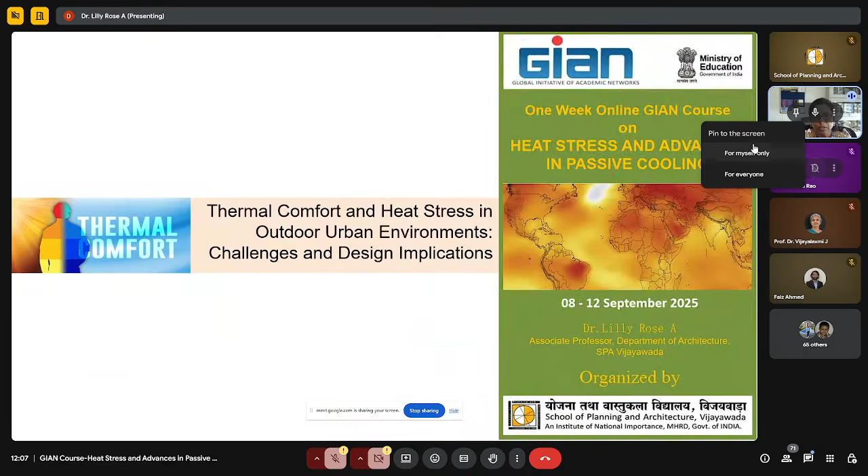So today I'll be giving an overview of thermal comfort studies, especially focusing on outdoor thermal comfort studies that have been done in a few Indian cities.

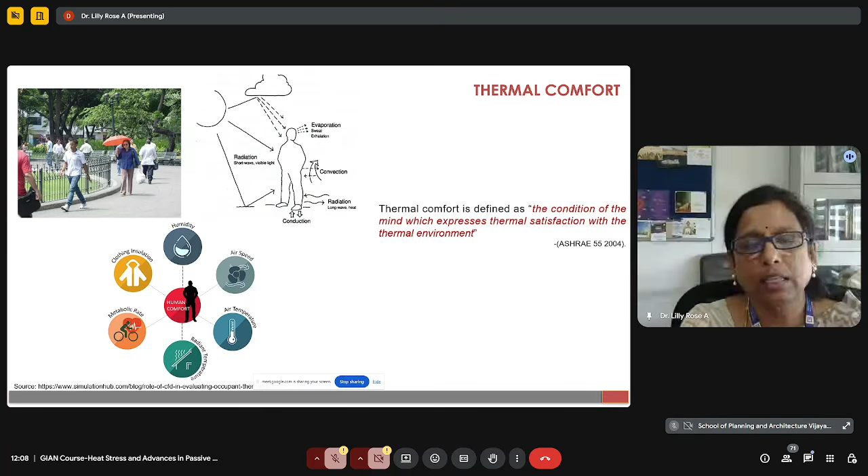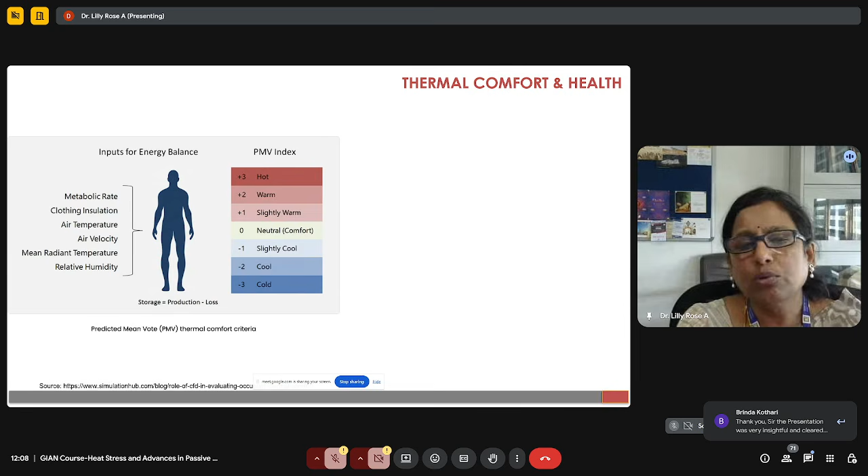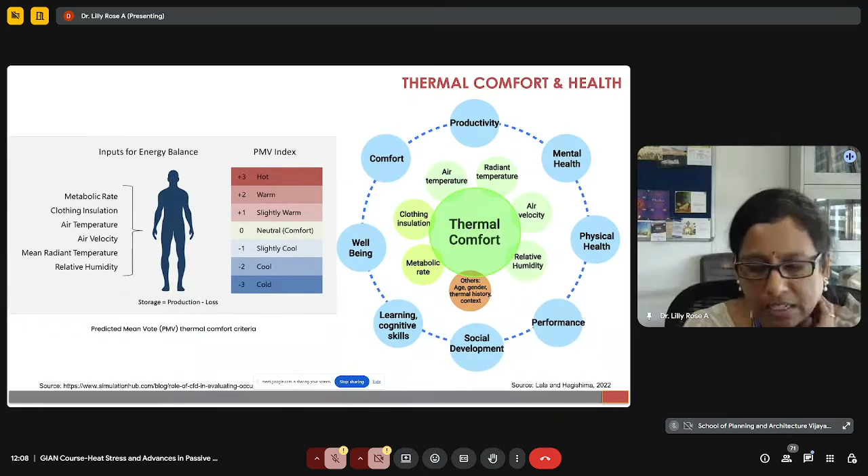So here we'll be focusing on all this. Why this is important is basically these studies would enhance productivity and have a significant impact on health. Thermal comfort affects productivity, performance, learning and cognitive skills, health and well-being. So it is important in all these aspects.

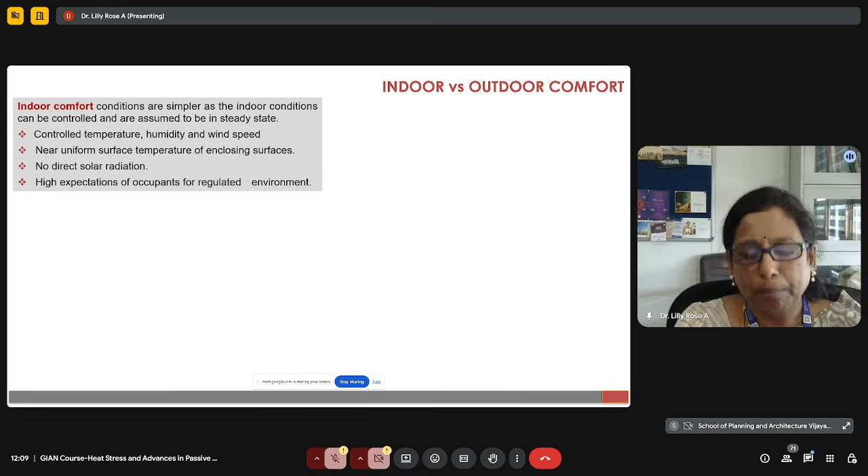Just to give a brief on why indoor and outdoor are different: indoor studies can have controlled temperature and controlled humidity. It's basically a steady state affair wherein all indoor parameters can be controlled, in the absence of direct solar radiation. When it comes to outdoor comfort, it is very difficult because you cannot predict the outdoor state of environment, it is not in a steady state condition.

It also varies in terms of the expectation of individuals, and there are three basic parameters which differentiate indoor from outdoor conditions. Basically, in terms of psychological aspect, that is in terms of adaptive nature, especially people tolerate a larger variation in climatic conditions in the outdoors compared to indoors.

In India, we follow somewhere around 24 to 28 or 24 to 30 degrees as a comfortable range indoors. But in terms of outdoors, we do tolerate up to 32 degrees, depending on the geographical region where the city is located. There is also this thermophysiological aspect, which affects comfort based on clothing level and activity level.

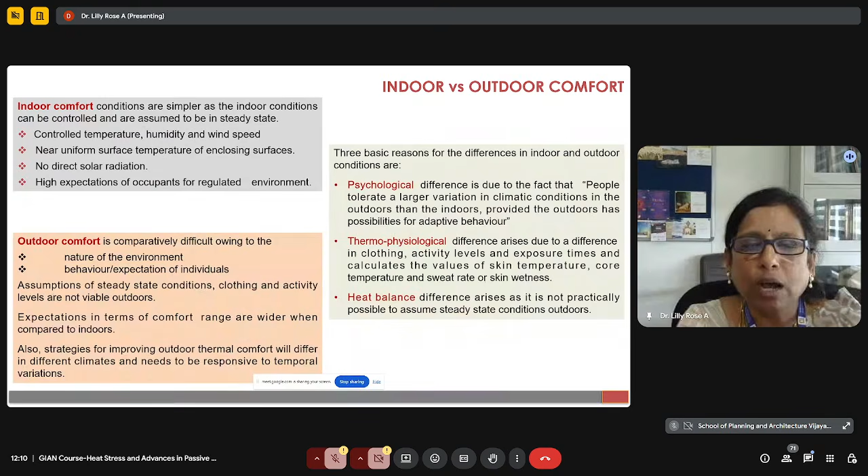Even during a hot summer day, we see cricket matches conducted in the afternoon because people's expectation is different, their mental state is different. So the comfort ranges vary depending on the activity you perform. Then there's the steady state condition, basically the heat balance, so outdoor comfort ranges are much wider compared to indoor comfort ranges.

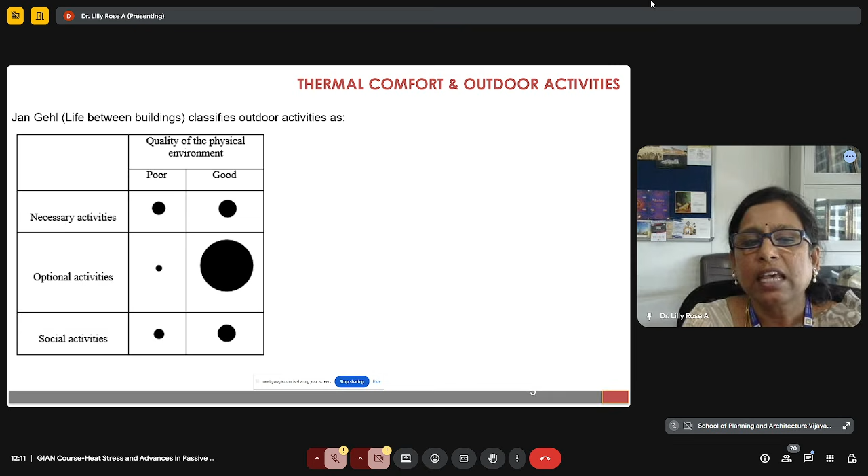This affects the activities performed outdoors. For necessary activities, irrespective of the outdoor condition being good or poor, we still perform them. But for optional activities, they are significantly reduced when the quality of the outdoor environment and comfort conditions are not appropriate, and enhanced when conditions improve.

There is minor variation in terms of social activities. These uncomfortable outdoor environments result in people spending less time outdoors—we hardly see people outdoors during daytime—and it reduces social activities and also reduces optional activities like visits to cafes, restaurants, or other outdoor spaces for leisure or recreation.

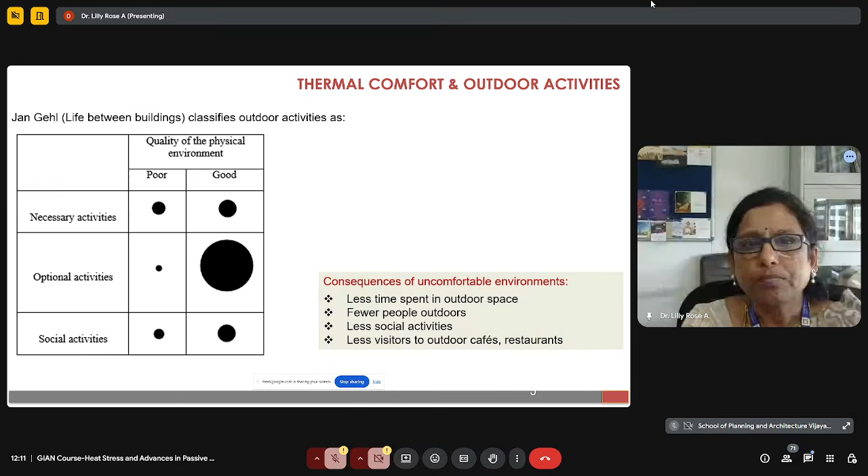To give a brief on indoor thermal comfort, the variation in meteorological parameters has quite small ranges. If you see the diurnal variation in indoor compared to outdoor, the diurnal variations are much higher outdoors. So here we can see that the temperature varies.

These variations create different kinds of thermal feeling or thermal sensation in human beings. Within a short spatial region outdoors, conditions vary a lot. If you stand between two buildings, there can be heavy wind speed, but if you go to the street, the wind conditions completely differ. Similarly, standing under shade, the comfort condition differs, and standing directly under the sun, the comfort condition differs. So there is a lot of spatial variation in outdoor conditions compared to indoor.

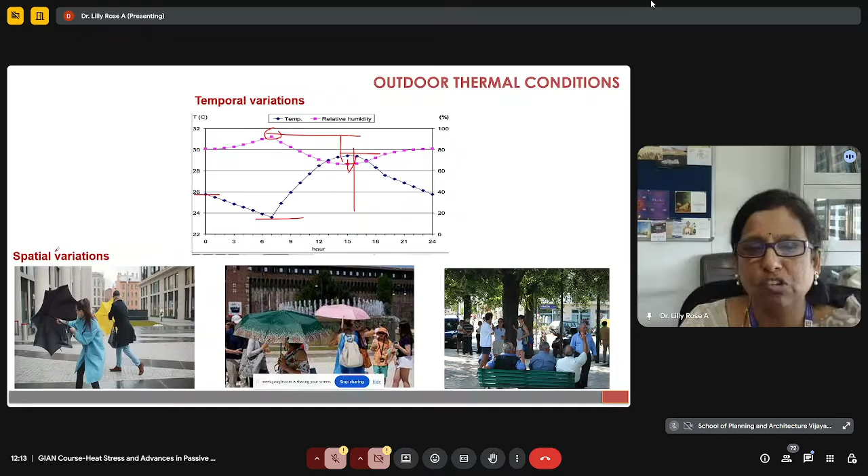These temporal and spatial variations create different kinds of thermal perception and sensation outdoors, including wind conditions. Indoors, anything beyond 1 or 1.5 meters per second, people cannot withstand and find it quite uncomfortable. But outdoors, people can withstand wind speeds ranging from about 2.5 meters per second to about 10 meters per second, depending on the activity being performed.

When performing fast walking or jogging, you can even withstand wind speeds up to about 8 to 9 meters per second. But if you're just relaxing or sitting, you can withstand up to about 2.5 meters per second. This is the kind of variation in wind speed that we perceive outdoors.

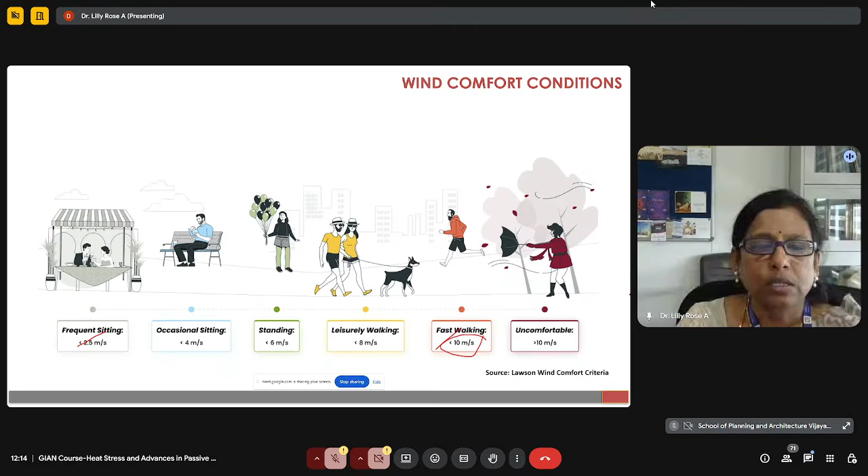So to give a brief summary, depending on the latitude, dry bulb temperature, relative humidity, and wind speed, our comfort perception or sensation differs.

This is an example of how temperature and humidity behave and how they yield comfort conditions. This is in Lund, Sweden, where the temperature variations are between 17 degrees Celsius to about 2 degrees Celsius, ranging from summer to winter. The relative humidity percentages vary from about 66% to about 91%.

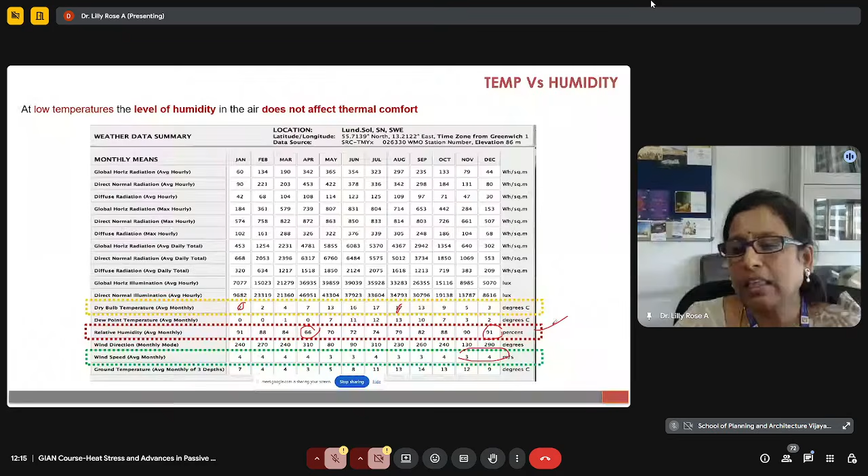So the relative humidity is quite high, but we will not feel uncomfortable because the temperature hardly crosses 20 degrees Celsius. Though the relative humidity is high, at lower temperatures we won't feel very humid, and it may not have a negative impact on comfort. You can also see wind speeds here are quite high, ranging from 3 to 4 meters per second. So here it is the wind chill index that matters a lot rather than the humidex index in creating discomfort.

So here, if you see, this is the comfort condition. These areas where you feel uncomfortable are mainly due to the higher wind speeds and not because of the higher humidity. Though the humidity is quite high here, the discomfort is mainly due to wind speed and temperature, not humidity. Whereas in the same case, this is Vijayawada.

All three examples I've chosen are humid conditions, but the first one is cold and humid. Here, this is hot and humid. The temperature ranges between, the maximum is somewhere around 32 degrees and the minimum is about 24 degrees. So we just have roughly around 8 degrees variation between winter and summer.

The humidity ranges from about 65% to about 81%. Though the humidity is lesser compared to Lund, which is cold and humid, here the issue in terms of comfort is mainly due to humidity and higher temperature. The high temperature and higher humidity is causing the discomfort. You can also see the wind speed is hardly 1 to 2 meters per second, so it's lesser. The discomfort is mainly due to higher temperatures and higher levels of humidity.

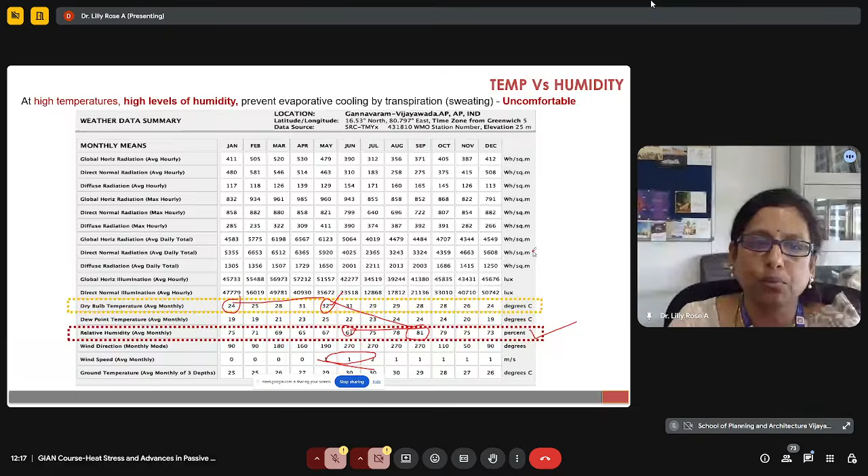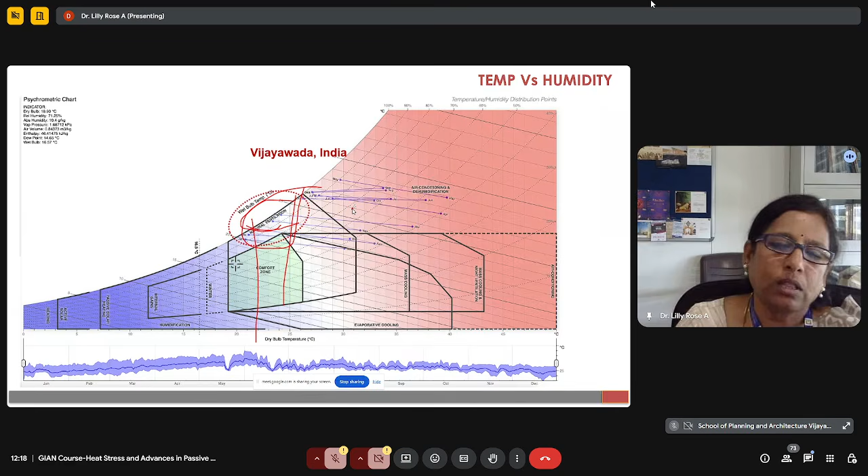Here we can see the temperature ranges somewhere around 22 degrees Celsius to around 26 degrees Celsius. Even at that particular 22 or 26 degrees Celsius, we would find discomfort mainly because of higher humidity ranging at around 70% or 80%. This would cause a lot of discomfort in terms of outdoor conditions. So this is another place, this is Hong Kong.

So this is basically a warm and humid climate where you can see the temperatures are basically ranging between 16 degrees Celsius to about 30 degrees Celsius in summer. And here again, the variation in relative humidity is similar to what we saw in Vijayawada, somewhere between 65 to 76%.

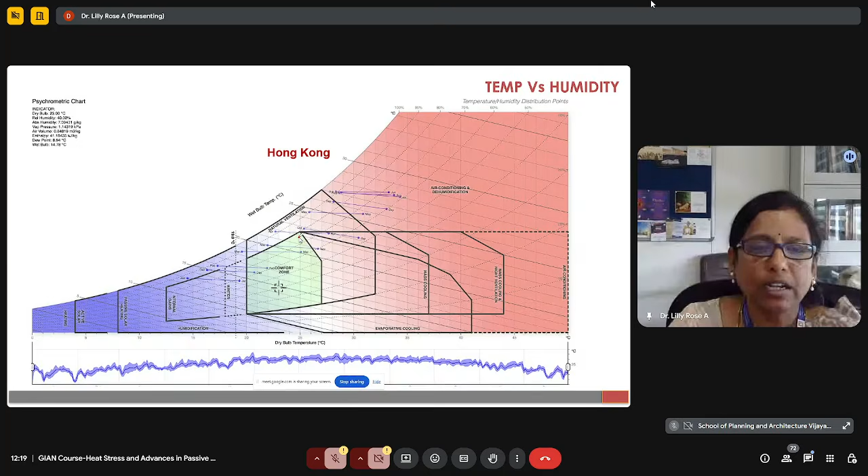But here the comfort conditions are comparatively better than Vijayawada, though the temperature ranges are 30 degrees and the relative humidity is similar to what we experience in Vijayawada. Here the temperature ranges are different, but the higher wind speed, 3 to 4 or 5 meters per second, enhances the comfort. So you can see here a lot of lines fall within the comfort range, mainly because of higher wind speeds.

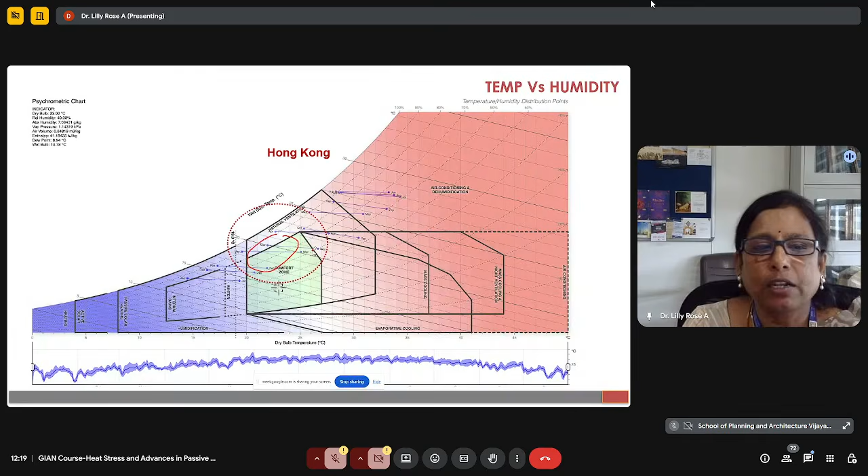So the issue is what we need to look at: it is not just the values, it is a combination of the temperature, the humidity and the wind speed. In cold climates, the wind speed creates a lot of wind chill index, but in hot climates, the humidity and higher temperatures lead to a lot of discomfort.

I think these things we have already discussed. The mean radiant temperature, basically when it comes to outdoors, during daytime we gain a lot of temperature, like Dr. Fayez was mentioning, during daytime the MRT increases. So it is basically the reflected radiation that one perceives during daytime, and that would create a lot of heat gain in the human body.

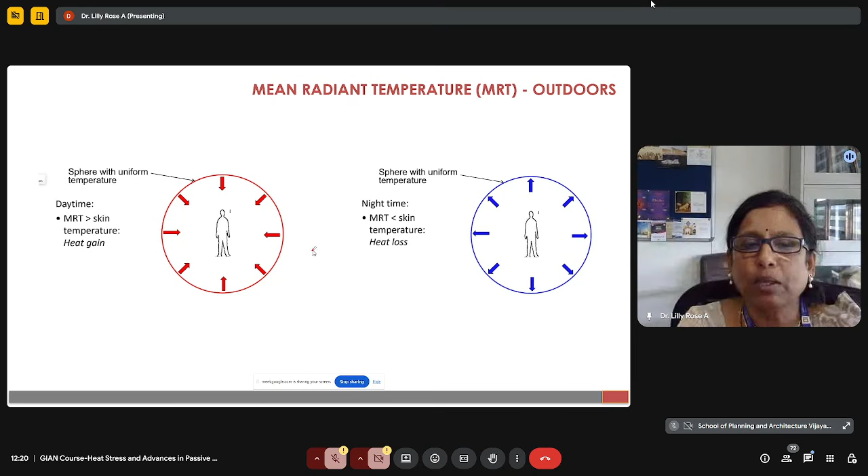During night, in the absence of solar radiation, we lose heat to the atmosphere. So this is important: mean radiant temperature is an important index which we need to look at, because that would define whether we are going to gain heat or lose heat to the environment.

And as I mentioned, though the temperature, if you see here, in all three cases is only 20 degrees Celsius, the weather at that particular time matters. So this MRT is also predominantly based on the weather condition on a particular day. If you see at 20 degrees Celsius, if it's cloudy and calm, we would feel the same temperature. But the same 20 degrees Celsius, when we have higher solar radiation, which would result in higher MRT and heat gain, though there is no wind speed, we would feel a temperature of about 30 degrees Celsius.

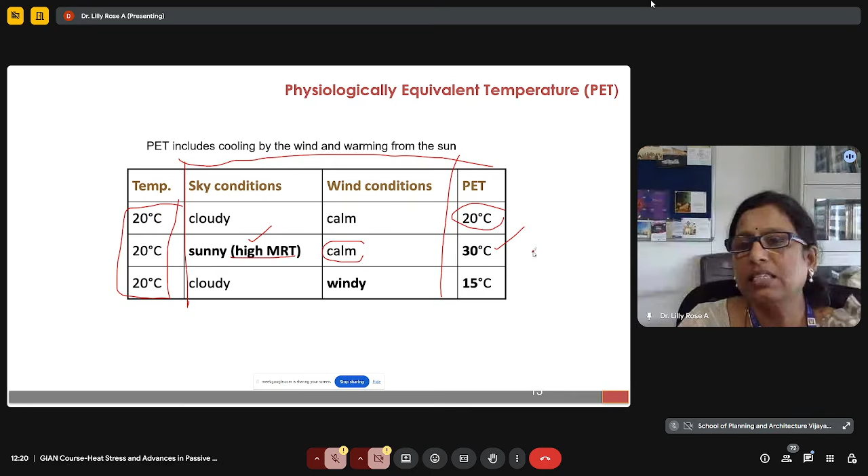This is basically our comfort index in terms of PET. So the higher solar radiation, we would gain a lot of heat, so we would feel as if it is 30 degrees Celsius. Similarly, with 20 degrees Celsius, when it is cloudy and windy, though it is 20 degrees Celsius, because of higher wind speed, we would feel as if it is 15 degrees Celsius.

So it also depends, the comfort also depends on the weather condition at that particular moment, and that also affects our comfort feeling or comfort sensation. Basically, there are a lot of outdoor thermal comfort studies that have been done in terms of field surveys, field measurements and simulation, which we have seen over all these 4 days.

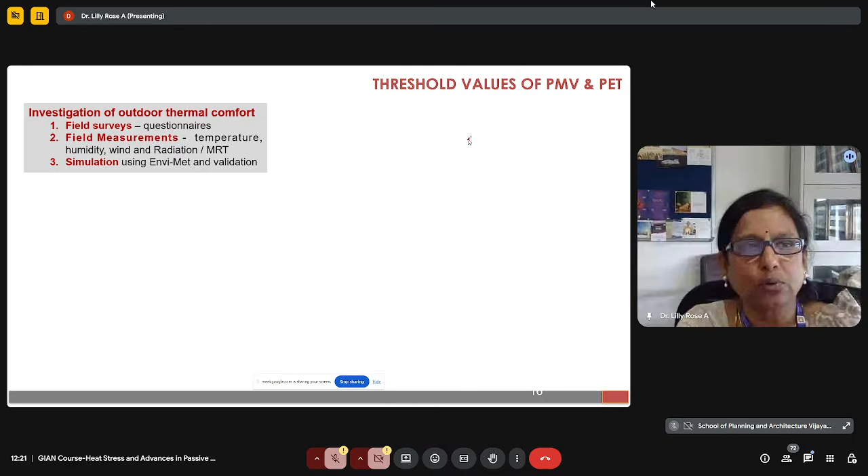Here these are the threshold values that have been defined. How do we feel? Because the thermal sensation analysis indoors differs from that of outdoors. So here you can see this is a standard threshold value defined by Matzarakis.

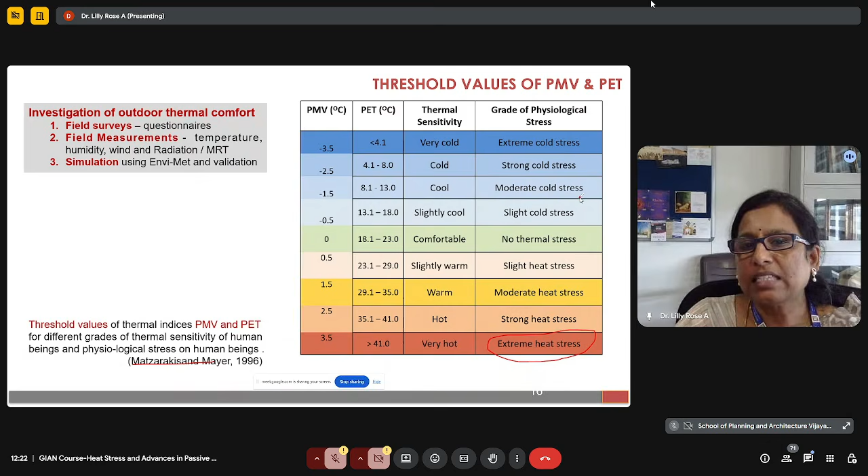Basically here it ranges from less than 4 to 41 degrees Celsius. Anything beyond 41 degrees Celsius is termed extreme heat stress. Anything less than 8 degrees Celsius is termed strong cold stress. Generally here it is defined that 18 to 23 is the comfortable range, but this would differ in terms of Indian cities. So this is a study done by Kotharkar, wherein comfortable ranges have been defined for Indian cities where we feel extremely hot, especially in the tropics.

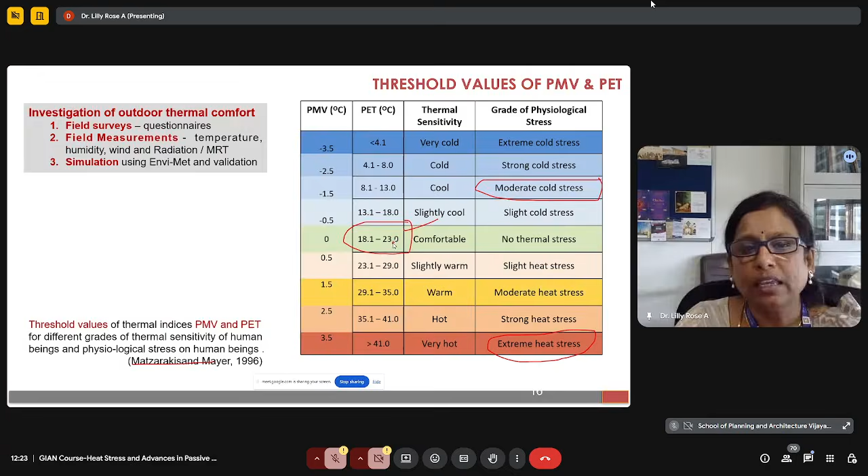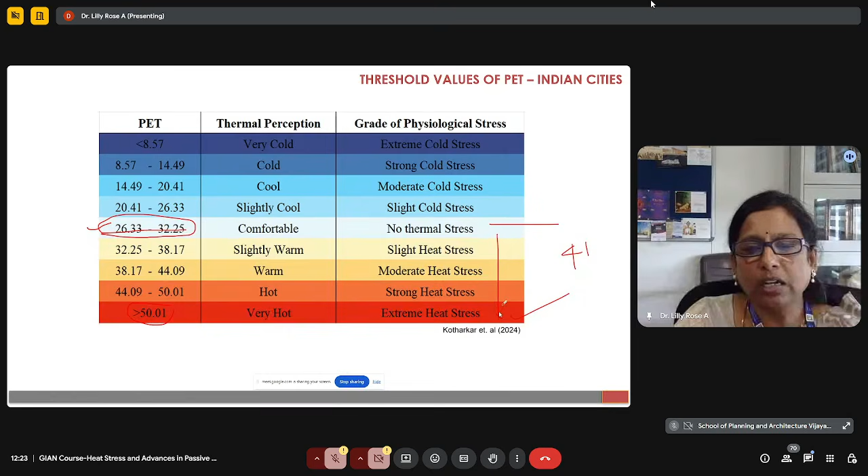So it ranges, whereas in the previous study it was about 18 to 23, here they have found that the comfortable range varies between 26 to 32 degrees Celsius, wherein there is no thermal stress. Anything beyond 50 or 51 is termed extreme heat stress, whereas in previous studies in other countries it was only 41 degrees. So here the heat stress varies from about 32 to 51 degrees, categorized into slight heat stress, moderate heat stress, and strong heat stress.

So these again vary based on the thermal sensation scale, thermal comfort scale, as well as thermal tolerance scale. Based on these, based on the number of points that you analyze, the ranges vary and differ accordingly.

So based on these, now we just go through some of the studies of how heat stress in outdoors could be mitigated through some design strategies.

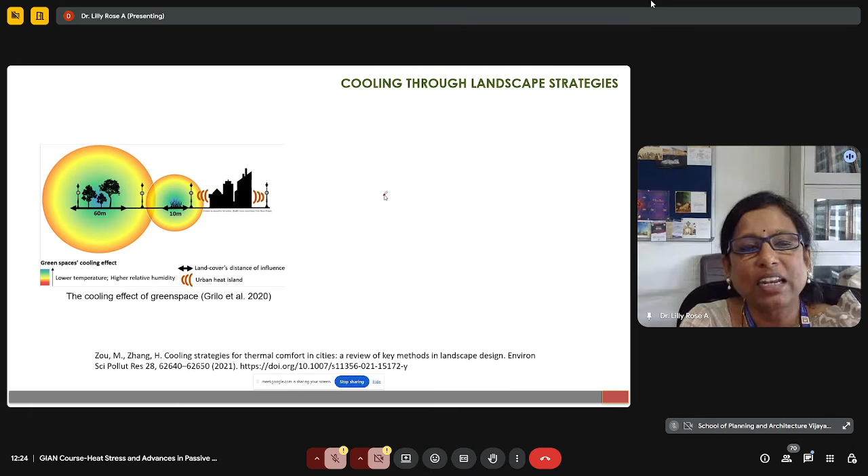Professor Matt has given an elaborate indication of these landscape strategies, wherein these impacts. So if you see, having a ground cover, I think even in Dr. Fay's study, we realized the ground cover could not provide a lot of comfort. So the impact of ground cover is only to a range of about 10 meters, whereas the impact of a group of trees and shrubs can impact the microclimate up to a range of about 60 meters.

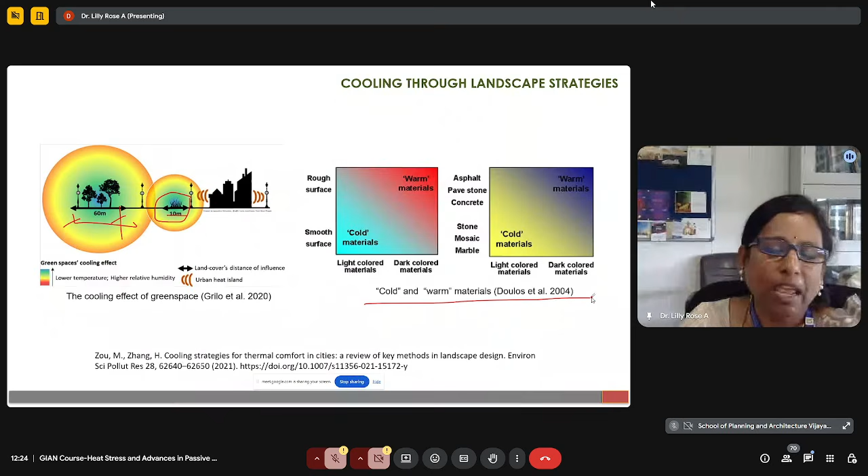Similarly, the materials - yesterday Professor Matt presented on a lot of these cool materials, where there was a list of 9 phases of materials which he discussed. So these materials used in pavement can also vary the outdoor thermal comfort, and the ranges vary from local to city level. Integration of artificial structures like green wall, green roof, fountains can affect things at the local scale.

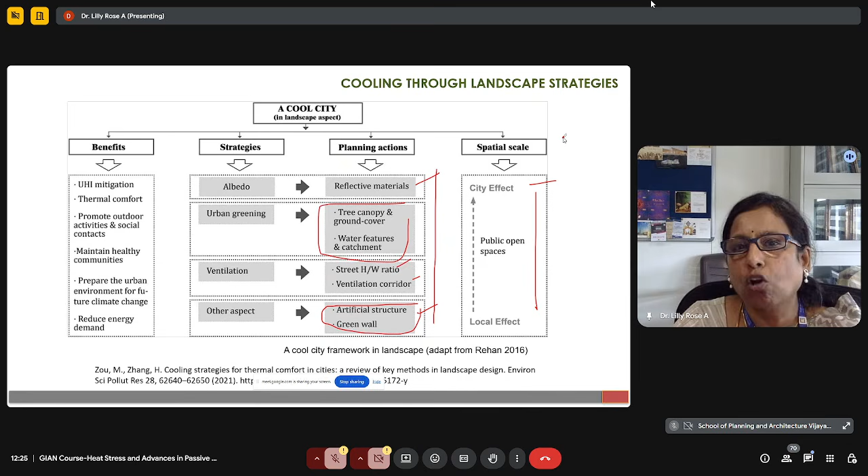Similarly, at the neighborhood level, we can either have canopies. I think we did see Professor Dr. Fayez mentioning about spacing between tree canopy. So that also matters because that reduces the sky view factor, which will also have an impact on thermal comfort.

The portion of the canopy that shades will have better cooling when compared to areas that are completely exposed to sun.

Then these kinds of temporary shading structures - yesterday Professor Matt was mentioning about dynamic shading structures, movable shading structures. We can either have static or dynamic, and the shade of these structures falls throughout the day and varies from morning to evening. So these areas can be shaded, or not shaded throughout the day, but at some point of the day the shade keeps on moving. So the pattern of usage of these outdoor spaces can also vary based on the shading ranges.

So exposed areas again can be enhanced by means of introducing water features, so that it can add some kind of humidity into the atmosphere.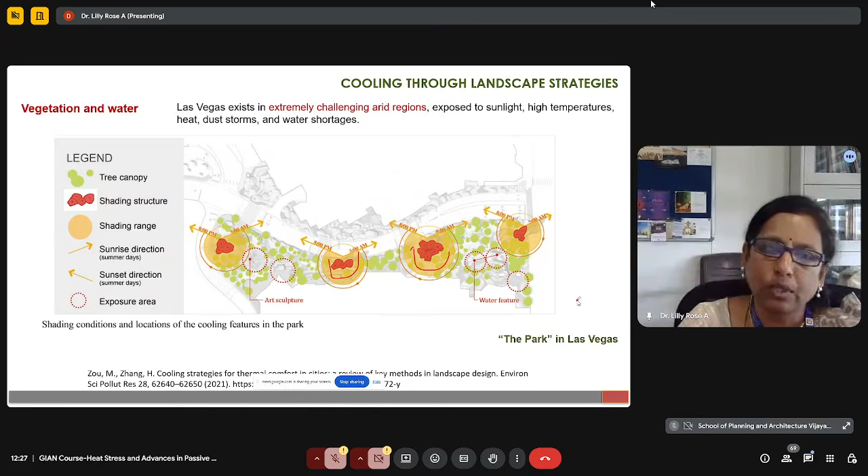There are also other studies, like we discussed, in hot and arid climates. Here again, strategies from 50% grass along with trees, 50% grass with 25% trees, 50% grass with 50% trees, and 75% trees are underlined.

Here again we can see, getting into these, they are basically simulated studies using ENVI-met software. We did mention these on-site measurements are important. Dr. Fayez also mentioned these are important when we use simulation studies because validation is required. So when we simulate in software, we have to collect on-site measurements and validate those.

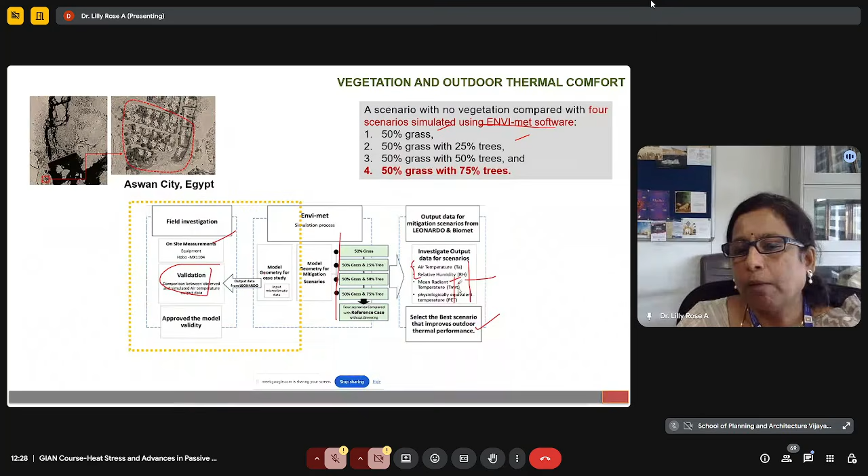Different strategies were analyzed, and the best strategies that improve outdoor thermal performance were analyzed. Again, the parameters analyzed vary from individual meteorological parameters like air temperature and humidity, and also comfort indices in terms of MRT, PET, UTCI, all of that can be analyzed.

So again, these are different strategies wherein we can see: first, in a neighborhood they improved only 50% grass cover. The second strategy, 50% scenario, basically 50% with 25% green cover. Then the third one, 50% ground cover and 50% green cover, and 50% ground cover and 75% green cover.

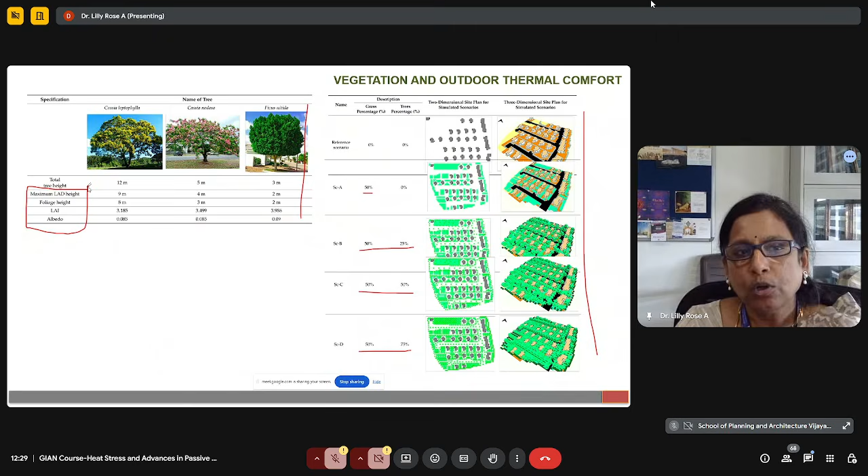So they performed this in a neighborhood, and the selected trees depend on the parameters that they chose: leaf area density, foliage height, leaf area index, and albedo. These were selected, and then within the neighborhood, different scenarios were analyzed.

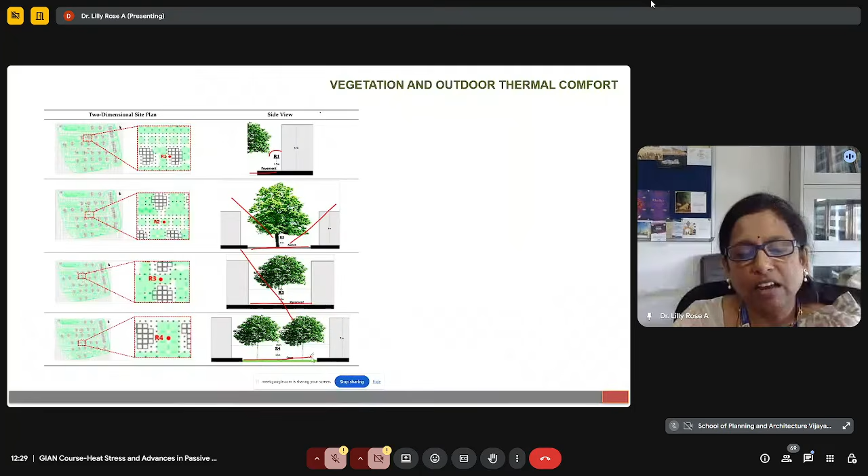They selected 4 points: one location where they had pavement and tree shade only on one side; another location between two building surfaces with asphalt road; another location between two buildings but with pavement; then a location where there is green cover, grass, where the number of trees and tree canopy has been increased. So they tried to analyze these.

So this is at location R1, how it performed in all four scenarios that were analyzed. We can see this is our temperature reduction in terms of Kelvin.

The temperature reduced during nights till about 6 a.m., then it started increasing, and this again depends on the sun angle. This reduction after 6 a.m. to 12 a.m. depends on the shade, mutual shading between buildings, and also depends on the sun angle, and it just elevates in the afternoon and then it decreases. This varies point to point depending on the shading condition in the night.

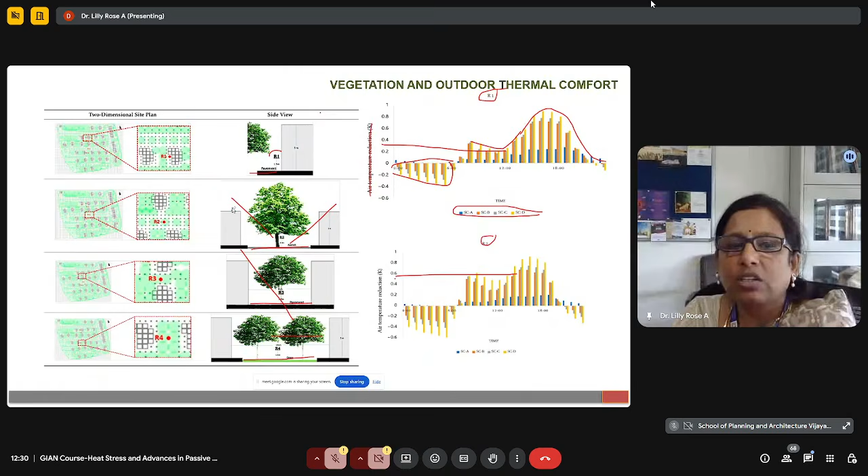Here you can see it reduced to about 0.2, whereas here the reduction is only till about 0.4. This is R2, which is this location, because the tree did not reduce it. Here it was just open. So the reduction we can see up to 0.2, and there are some spaces which are exposed to the sky, so it can radiate back. You can also see the reduction here.

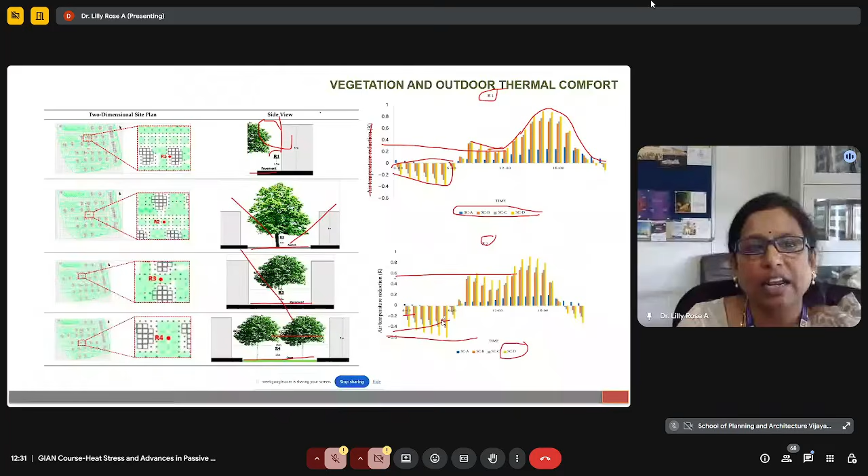When it's here, it is somewhere around 0.5 reduction in the night, ranging from 0.2 to about 0.5. As the density increases, this is wherein 50% grass cover and 50% tree cover, so the temperature reduction is also enhanced, mainly because of increase in relative humidity, this being an arid condition in Egypt. So these are different scenarios and different points.

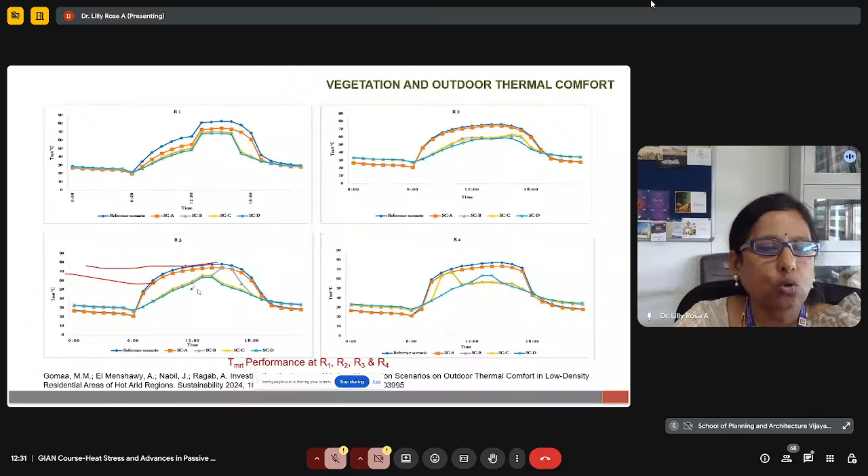You can see a reduction here - this is the base case - from about 70 degrees to about 55, around 15 degrees Celsius reduction, but the behavior differs. Here it is only one side tree and it is a pavement. Here it is two side tree with asphalt. So here the second scenario did not perform well, but the other three scenarios performed well.

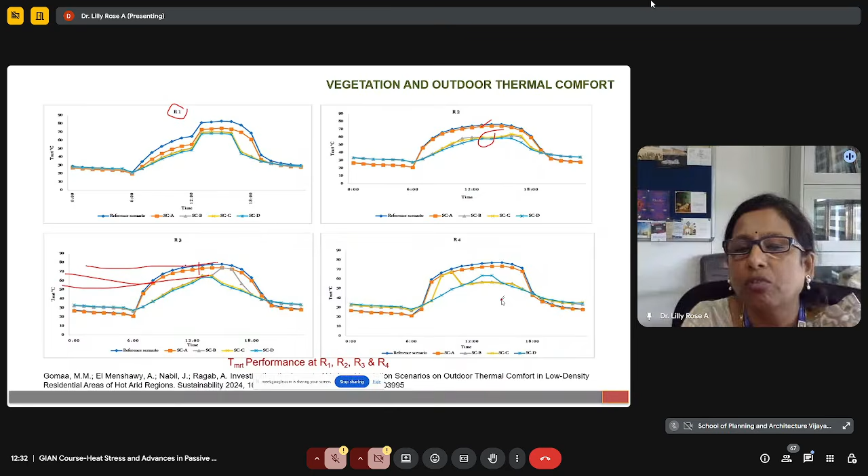Wherein here, which has ground cover, and then trees with ground cover and trees with pavement - the ground cover matters a lot in terms of heat that is being radiated back into the atmosphere. Then these are some of the studies that have been done in Chennai.

Now we'll move on to some of the studies that have been done in India. This is a study done in Chennai, a region called Thyagaraya Nagar, which is a mixed residential neighborhood. Similar to Dr. Faiz, we had taken three LCZ locations within Chennai, wherein we try to analyze how the building regulations impact outdoor comfort conditions. The first case provided the existing building regulations.

We just assumed maximum built-up with the existing building regulations. Then the same thing was introduced with increasing height and reducing the plot coverage. That was the development regulations in Chennai modified in 2019. So we tried to see what would be the impact of this modified building regulation, which had increased building height and increased FSI, while the plot coverage was reduced.

That gave way for a lot of open space at the site level, wherein here we considered the existing vegetation itself, and in case 3 we increased the open spaces available at the plot, converting 50% of that into vegetation and trees planted at an interval of 6 to 9 meters. This increased the permeable surface fraction and the green cover fraction. So these were the three scenarios analyzed to find out which had the maximum enhanced outdoor thermal comfort conditions.

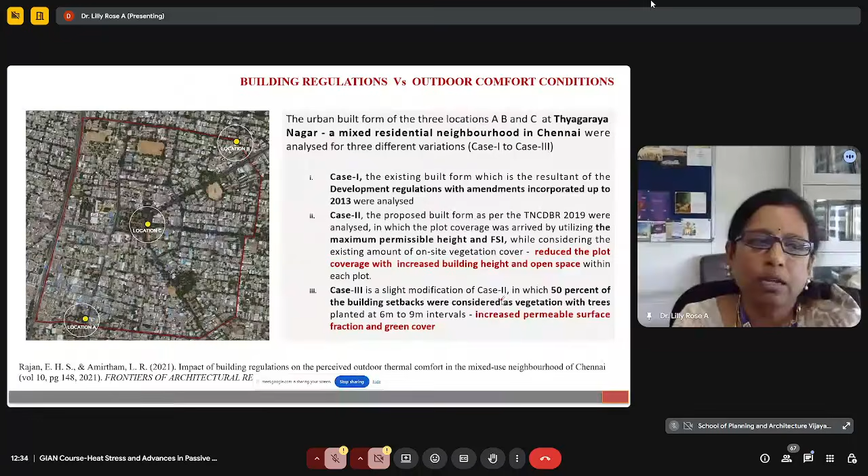These were the three locations, and in the first case we could see these are the parameters as per the LCZ classification. So we analyze the sky view factor, the aspect ratio, the building surface fraction, impervious surface fraction, pervious surface fraction, height of roughness element. If you see this, the height of roughness element increased with building height.

If you see here, the height of roughness elements are lesser because the building heights were much less. In case 2, the building heights were increased, but then vegetation was not increased. So the roughness element increased in case 2, wherein the building heights are increased and plot coverage reduced, but retaining the existing vegetation.

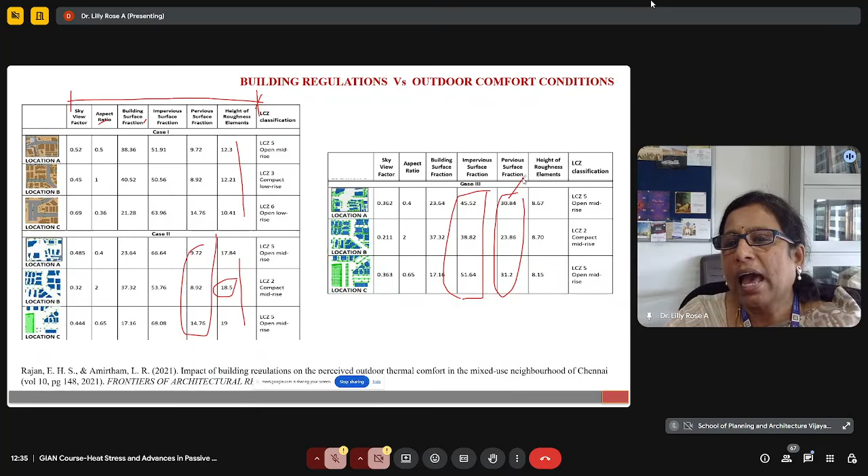In case 3, the green surface fraction was increased, which increased the permeable surface fraction. The pervious surface fraction is increased significantly from case 2, and the impervious surface fraction has reduced from case 2. So this enhanced the comfort. We just try to analyze this, and these were plotted.

In the base case, the number of hours of extreme heat stress—defined as greater than 50 degrees Celsius based on PET values—was just 7 hours. In the improved case, with 50% conversion of the plot area into grass cover and permeable surfaces, the extreme heat stress is completely reduced, moving into the moderate heat stress range of 46 to 50 degrees Celsius, as considered by a recent study in India.

This has reduced the number of extreme heat stress hours in all three locations. Even in location B, which had just 2 hours of extreme heat stress, this is completely reduced, and it doesn't even have moderate heat stress anymore—it significantly reduced to moderate or strong heat stress only.

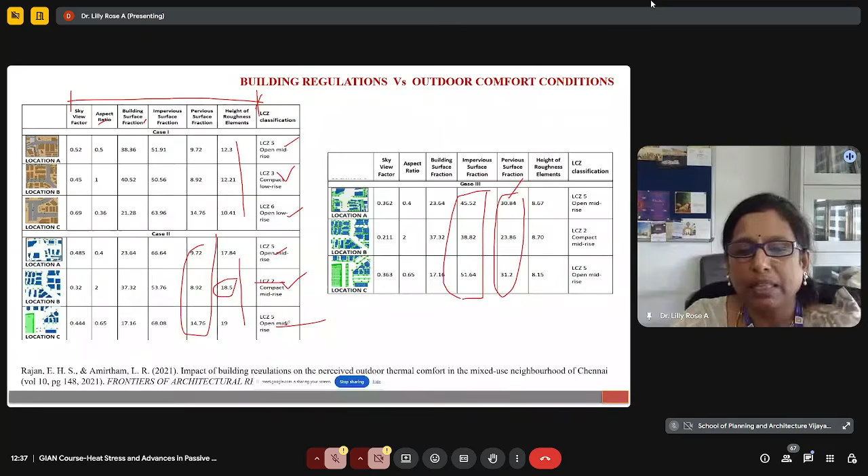The LCZ classification varied with varying building regulation. This was open mid-rise, and location A remained open mid-rise, but in location B, which was compact low-rise in the existing condition, it was modified to compact mid-rise because of building height increase. Location C, which was open low-rise, modified to open mid-rise because we increased the building height but also increased the pervious fraction. So the local climate zone classification also varied, which will have an impact on the enhanced comfort conditions.

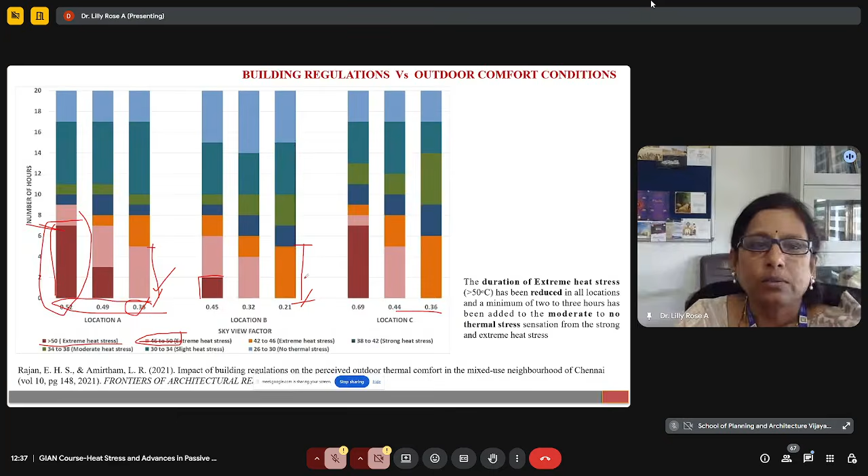The next study was done at Ahmedabad, where we tried varying building heights in gated communities, specifically near the Chharodi region, where high-rise buildings started cropping up in the recent decade.

We analyzed the aspect ratio in the high-rise housing gated communities and categorized them into three aspect ratio ranges: range 1 is 0.5 to 1.5, range 2 is 2 to 3, and range 3 is 4 to 5.5. We found the majority of buildings fall under aspect ratio range 2 to 3.

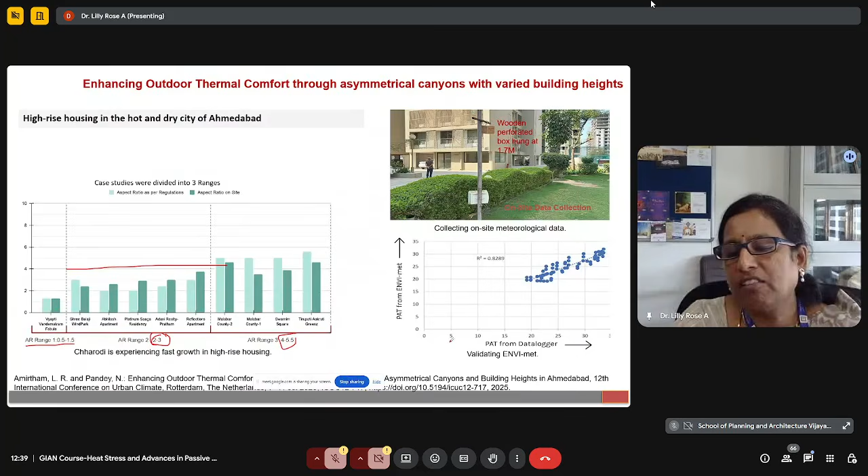So we chose one of the high-rise housing complexes in that 2 to 3 range, measured on-site data, and tried to validate it through ENVI-met simulation, and found a good correlation.

Then we varied various scenarios by varying the building height. First, we tried varying building heights in northwest and southeast orientation. Then we modified the variation in southwest and northeast orientations. Then we introduced shading blocks between buildings.

This was in terms of just a pergola or shade—not a floor, just a shade between the buildings—because we realized shading enhanced outdoor thermal comfort. We introduced it in the northwest-southeast blocks, and then the similar thing was introduced in the southwest-northeast blocks also.

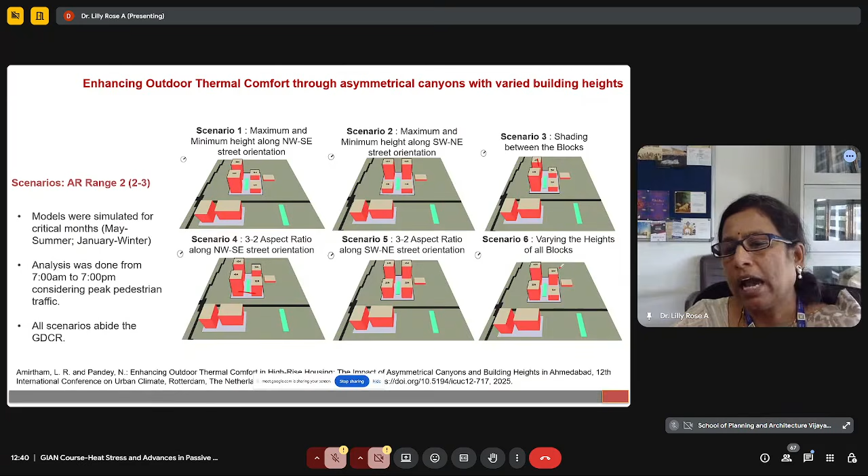Then we varied the heights of all the buildings and analyzed these in ENVI-met simulation, doing the analysis for both critical summer and winter conditions across the entire day. The first scenario was higher building in northwest-southeast, the second was southwest-northeast, the third included shading, then shading in the other orientation.

We found that from the base case, which had about 6 hours of extreme heat stress, that reduced to about 5 hours—just a 1 hour reduction. But the variation in PET values was significant: it reduced by about 2 degrees Celsius, from 52.4 down to about 50.4.

In winter, there was also extreme heat stress of about 5 hours, which was significantly reduced to 3 hours in scenarios 4 and 5. Scenario 3, though it had 6 hours of extreme heat stress, was quite comfortable in winter. So overall, scenario 3 performed better, and again we had a similar reduction of about 2 degrees Celsius—though the number of hours was the same, the reduction in values was significant.

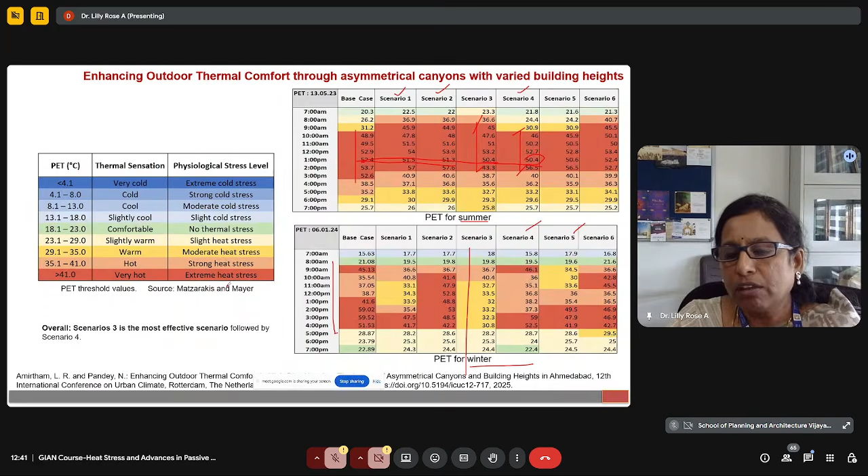So this analysis has to be done for both summer and winter. Doing it only for summer may not be effective because we have to take it on an annual basis.

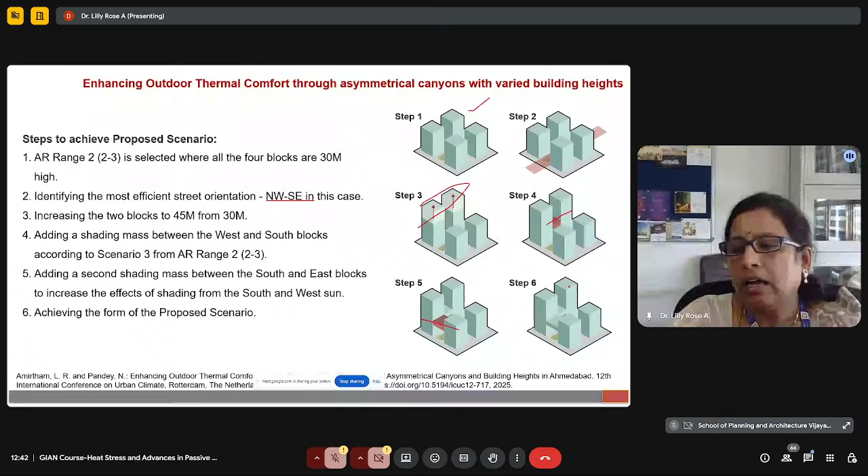So this was done, and then using the best performing scenario, we modified the same thing. The existing was uniform height of all 4 blocks. Then we oriented in the best orientation, northwest-southeast. Then we increased the height in the northwest, and introduced a shading block in the northwest, and introduced another shading block in the southeast. Then we performed the final analysis. This was the proposed scenario.

This again was analyzed between the other case scenarios and this proposed scenario which varied building height in all. Here when we vary the building height, there was just one consideration: we kept the FSI constant. We did not increase or decrease the FSI.

So normally in development regulations, there is a restriction on maximum height to be built. We just relaxed this to find out how it could enhance the comfort condition. It was not maintained as per development regulation, but FSI was kept constant. Certain relaxation was given in building height, but we did consider the air corridor. It was not in the air corridor. So the height was increased, but FSI was kept constant, and the saleable area remained the same.

That did not vary. With that variation, we could reduce from about 6 hours of extreme heat stress to about 3 hours, and a significant reduction of 2 degrees Celsius in the PET. It also had impact on moderate and strong heat stress, as we see an increase there, because extreme heat stress shifted to moderate and strong heat stress.

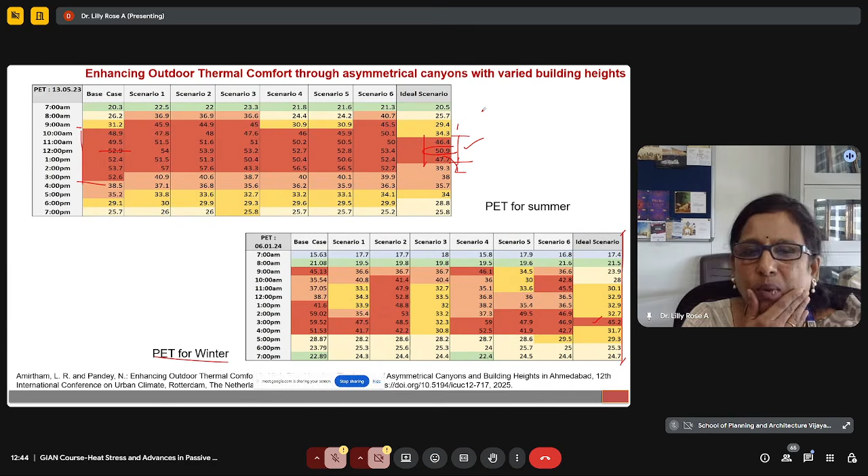A similar analysis was performed for winter, and we found that the scenario had just 1 hour of extreme heat stress, but predominantly throughout the day it was comfortable. Based on this, we suggest varying building height while maintaining the FSI, in terms of asymmetrical canyons, depending on the location. Here in Ahmedabad, the northwest-southeast orientation performed better. So these were the findings of the study.

We could see a reduction of PET from 53.7 degrees to 39.3 degrees in summer, and our MRT was significantly reduced. Even the PET in winter in the proposed state reduced to 32.7 from 59 in the existing scenario.

So the proposal of a 3:2 aspect ratio and northwest-southeast orientation worked better in the Ahmedabad scenario, but this would vary depending on the local geographic location and wind direction. All that matters and needs to be considered for the final recommendation.

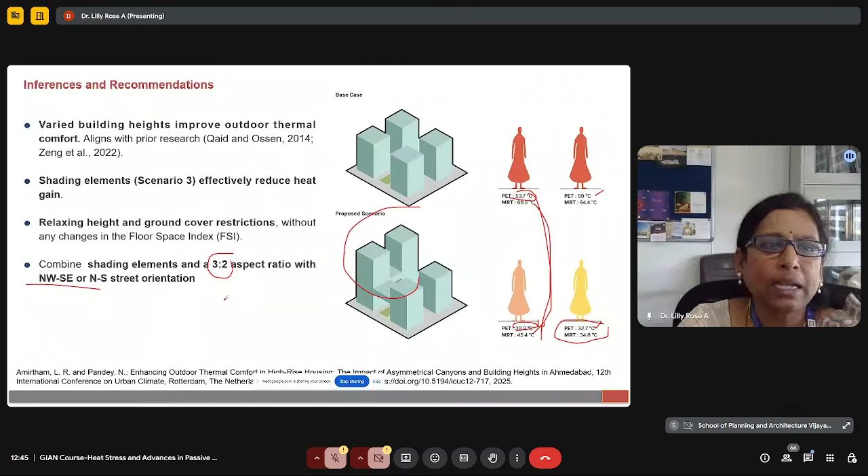This is another study which was done in Vijayawada, which is again a hot humid climate zone, where we tried to analyze the impact of sky view factor. Here also we varied the percentage of green cover and grass.

We took two narrow pathways—this is again a high-rise neighborhood—within the neighborhood which had a sky view factor of 0.224 and 0.342 respectively. This is the main pathway and this is the space between buildings. We tried to analyze how this could improve the outdoor thermal comfort conditions.

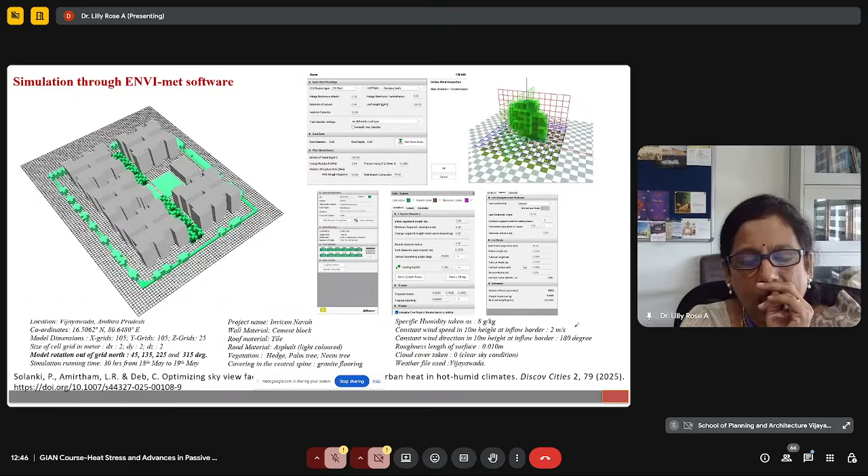Any questions? No questions, can I continue? Raghavi, anybody? Raghavi, are you trying to ask something? If you're trying to ask, please ask or type in the chat box, else please mute yourself because we are not understanding whether you want to ask anything. I'm not able to understand—please either ask your question or mute yourself because we are not hearing anything with clarity. Miss Raghavi Ilangovan, please mute yourself or ask your question. If you don't have a question, please mute yourself. The speaker is not able to understand whether you want to ask a question, and the talk is stopped now. Miss Raghavi, please mute yourself—doesn't look like she wants to ask any question. Okay, chat box, no. Okay, can I continue? Yeah, we can continue.

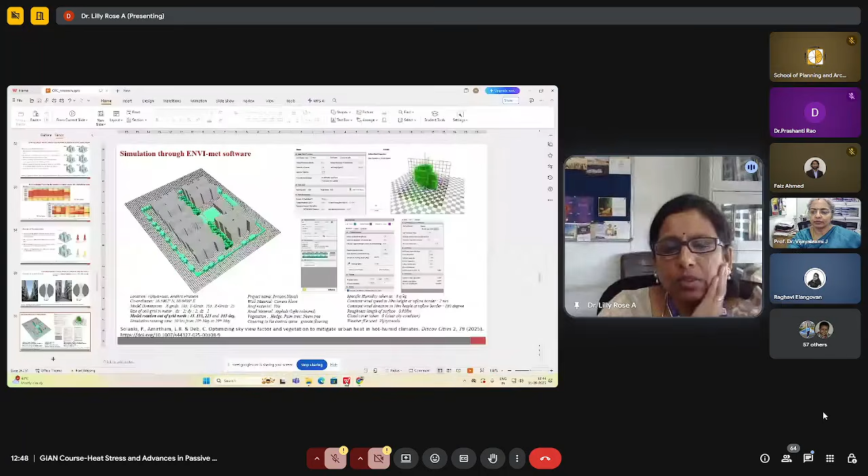So this study, we analyze different scenarios and also different orientations of this particular neighborhood. This is the typical layout which had 5 blocks and a club house. Actually the existing had 6 blocks; we removed 1 block to create space for open space there.

So this is the kind of scenario that we analyze. The first scenario was 20% tree cover. So we analyzed in different...

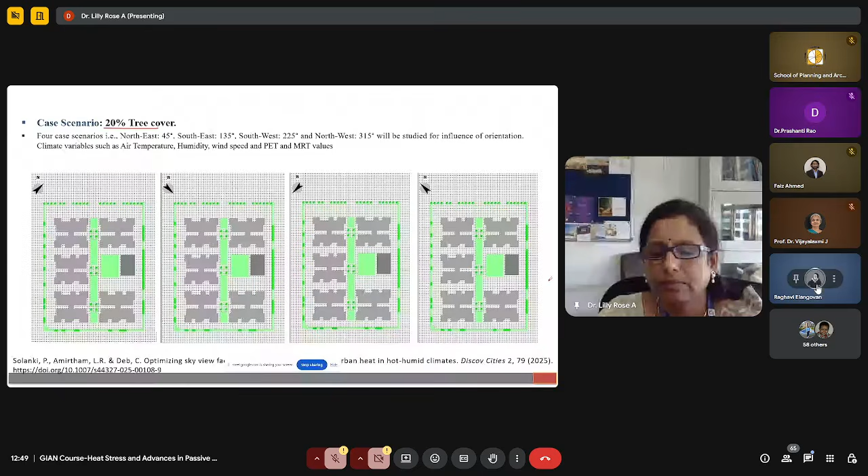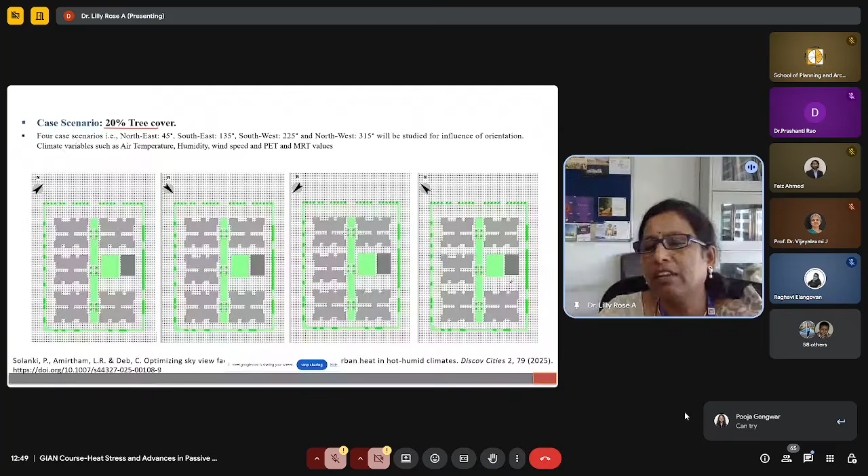We did analyze 20% tree cover with different orientations, rotating this to identify which orientation works best, and then we analyzed the same for various parameters like air temperature, mean radiant temperature, and PET.

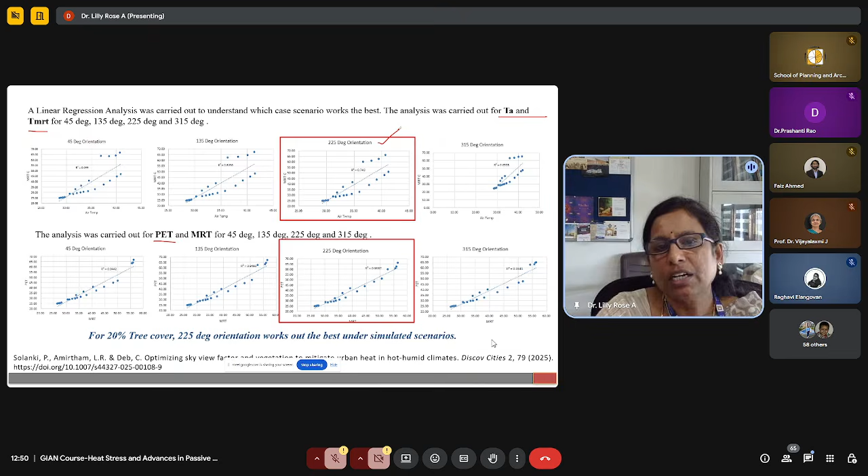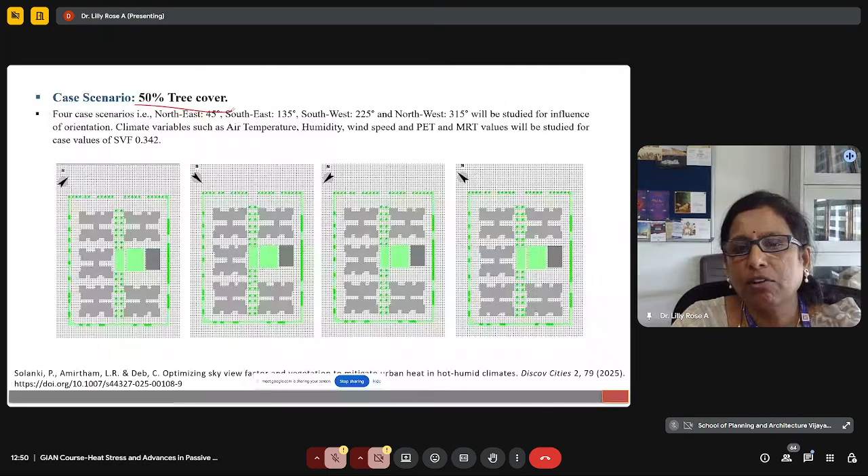We found that the 225-degree orientation, which is the southwest orientation, worked better because it created mutual shade between buildings, which enhanced thermal comfort. Then we did analyze for 50% tree cover. Similarly we oriented and found here the 135-degree orientation, that is basically the southeast orientation, worked better.

Similarly, for 70% grass cover - we did not go in for 70% tree cover because that completely covered the sky, so we tried to analyze that; this was taken from previous literature. Then we analyzed 70% grass cover, and this again gave 225 degrees as the best performing orientation.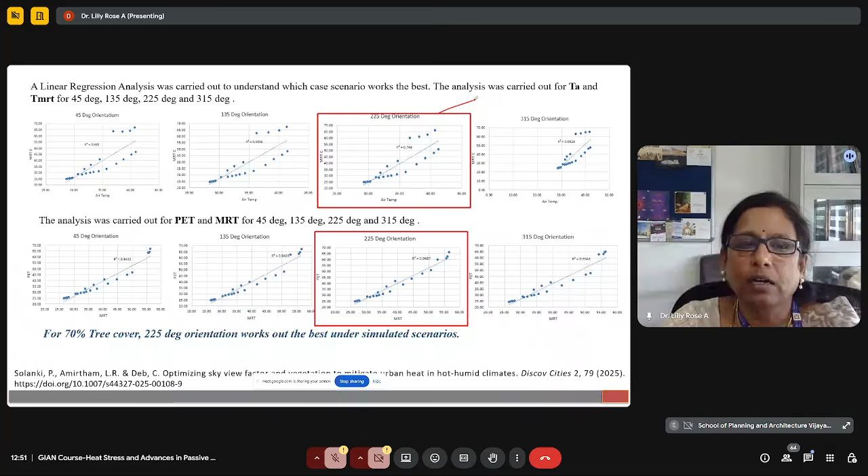Based on this, we did analyze PET. We can see that 50% tree cover and 20% tree cover more or less perform better, but here the reduction is significant, from 52 to 48.2. So it's roughly around 4 to 5 degree reduction in 50% tree cover, whereas in 20% tree cover we could get a 2 degree reduction.

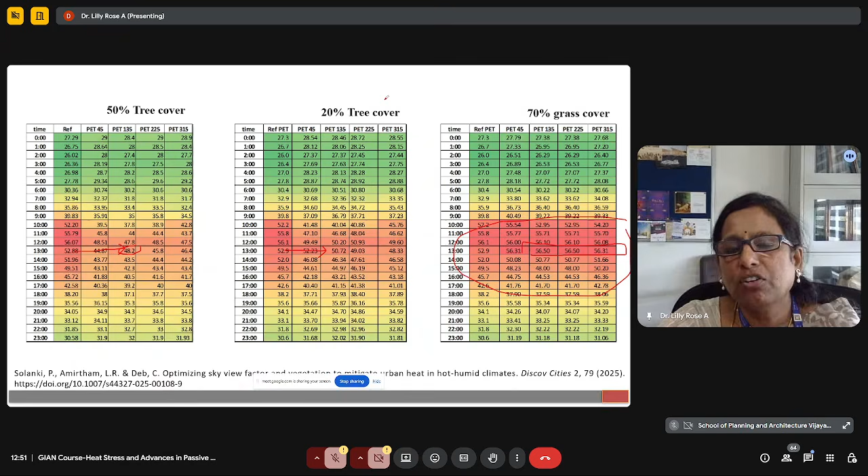Here if you see 70% grass cover, there was no reduction; instead it increased the PET values, as we saw in Dr. Fai's study also. So grass cover actually increases the PET value and also increases MRT value. So it is always better to go in for trees, a combination of tree and shrub, but grass cover beneath the shade may work better, whereas exposed to sky may not work better.

So this is the analysis, and we can see that a temperature reduction of up to 1 degree Celsius was derived from 50% tree cover, and a temperature reduction of only 0.1 degree Celsius was there in terms of 20% tree cover, and the temperature increased in 70% grass cover.

Similarly, in terms of MRT, there is a reduction of about 4.75 degrees Celsius with 50% tree cover, and it was 3.25 degrees with 20% tree cover, and the temperature increased in 70% grass cover. Similarly, a reduction of 2.5 degrees Celsius was observed with 50% tree cover in PET, and 1.6 degrees Celsius with 20% tree cover, and the temperature increased in 70% grass cover.

So after doing this study, we realized a reduction of 1 degree Celsius with 50% tree cover - how this could impact the energy consumption indoors. So we just modeled using this meteorological condition at this scenario.

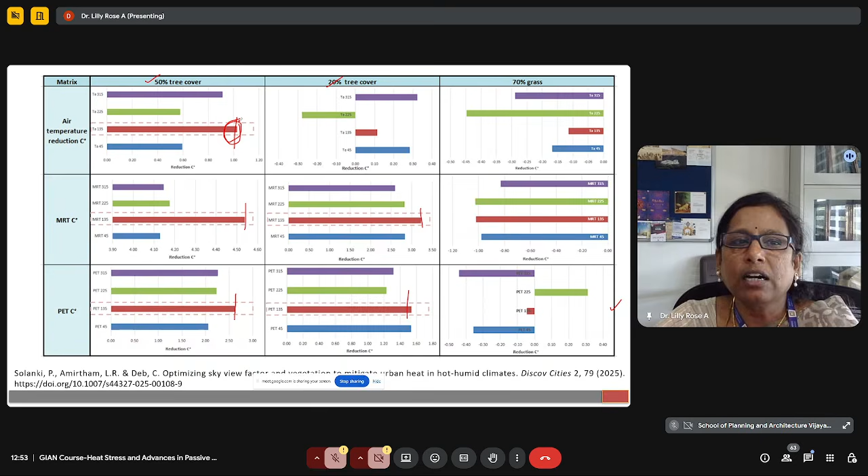We reduced the values of our temperature by 1 degree in the microclimate design in the EPW file, and then we ran the simulation in Design Builder to find the indoor energy consumption pattern during summer and winter. We categorized the building into 3 levels: lower levels, middle floor levels, and upper floor levels, because the energy consumption pattern also varied with the increase in number of floors.

So we can see that during summer, though this reduction is just done for 1 day - it has to be done on a monthly basis - we just ran the simulation for 1 day for want of time, but if it is run for a month, this can be done better.

So here we just multiply that into number of units on a monthly basis, and we found this is the saving on a monthly basis at different floor levels. Though this is lesser, the cost during summer depends on the total number of energy units consumed per month - as the number of units increases, the cost also increases, and this is the savings that we got.

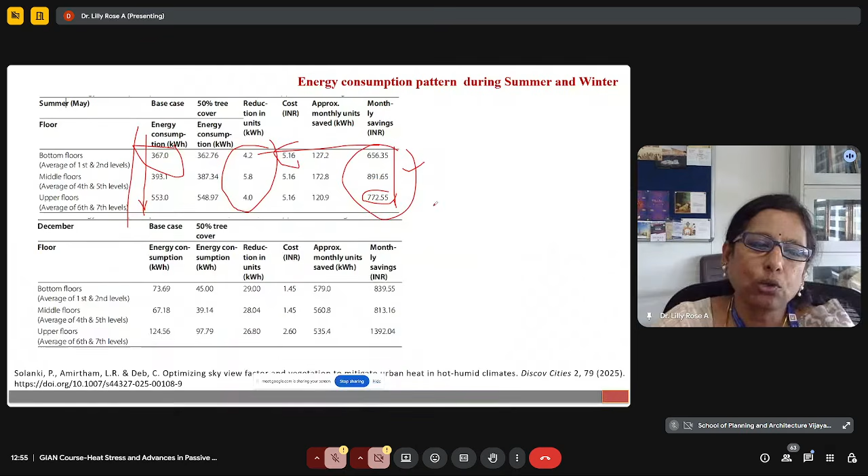During the study, we found the savings are much higher at higher floors compared to lower floors. Similarly in winter, the savings were much higher - the reduction in number of units is much higher, but it is more or less the same across all floors. But since in winter the total number of units consumed is much lesser compared to summer, the cost reduction per unit is much lesser.

We can get much better significant reduction in winter when compared to summer, because summer temperatures in Vijayawada are quite high. It ranges from about 38 to 43-44 degrees during daytime. Without air conditioning during daytime, it is not at all possible to stay indoors, so summertime savings are much lesser. But in winter, if the microclimate is modified, that can reduce the energy consumption pattern and enhance the energy savings. Winter temperatures in Vijayawada are around 34 degrees Celsius, and if that can be reduced by about 1 degree Celsius, it will have a significant impact on energy savings.

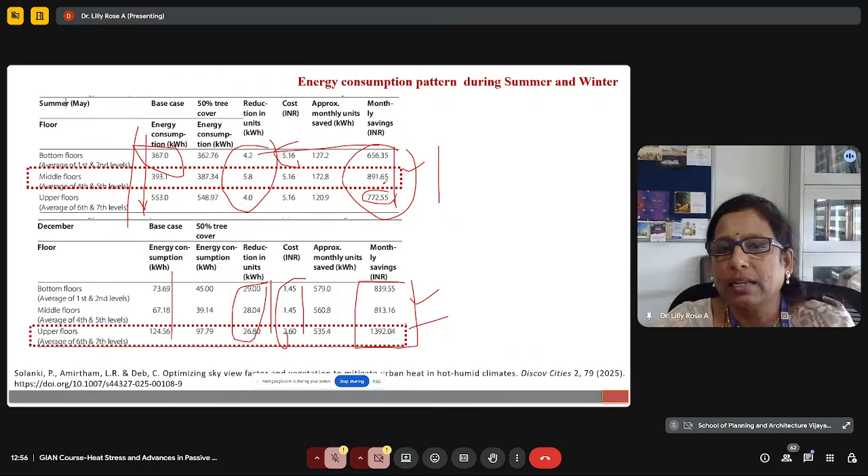So this was another study done at Vijayawada. We can see the savings: the middle floor had better savings in summer, whereas the upper floors had higher savings during winter.

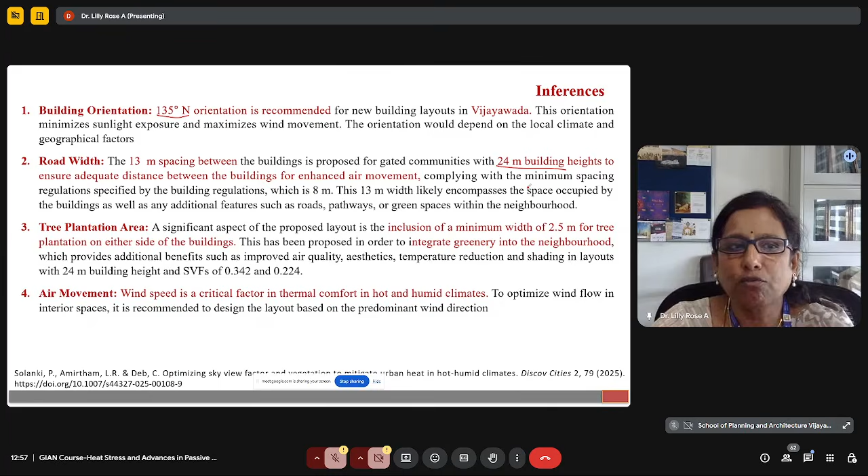As far as Vijayawada is concerned, the 135-degree north orientation, basically the southeast orientation, enhanced comfort by minimizing sunlight exposure and maximizing wind speed. Being hot and humid, wind speed played a significant role in enhancing outdoor thermal comfort. Generally, these gated communities had a maximum building height of 24 meters, so a 13-meter spacing was suggested between buildings, including 2.5 meters for tree plantation. This can integrate greenery or vegetation within the gated community, enhancing thermal comfort conditions outdoors, which will again impact indoor energy consumption, reducing it significantly. That was the finding of this particular study.

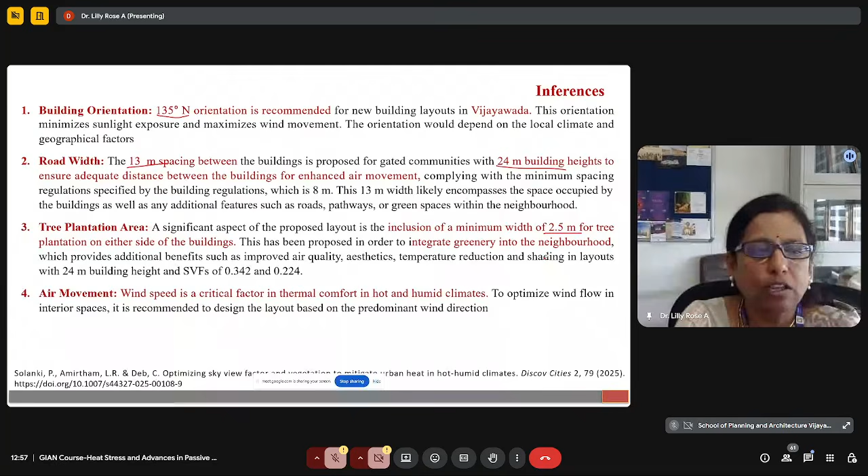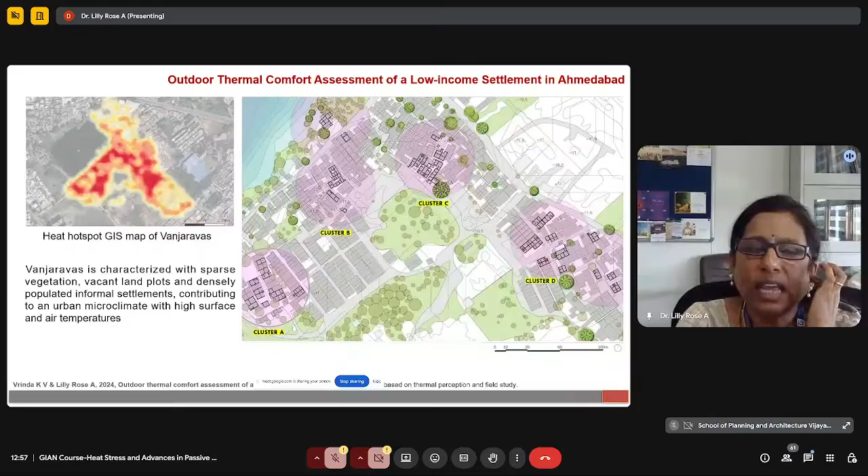There's another study done at Ahmedabad, especially in low-income settlements, found as a hotspot in Ahmedabad. We analyzed 4 different clusters, where we tried modifying the roof level, pavement level, and wall levels.

We modified different materials in the roof, which had higher albedo of 0.7, 0.8, 0.95. We also had medium albedo of 0.3. The study mainly concentrated on higher albedo. So we categorized H for higher albedo, M for medium albedo, and L for low albedo, as options used in pavements, walls, and roofs.

We tried to replace it with the existing condition, which had brick wall and GI sheet roofing, and some had asbestos cement and concrete pavement with bare soil. These were the existing conditions, so we simulated different scenarios.

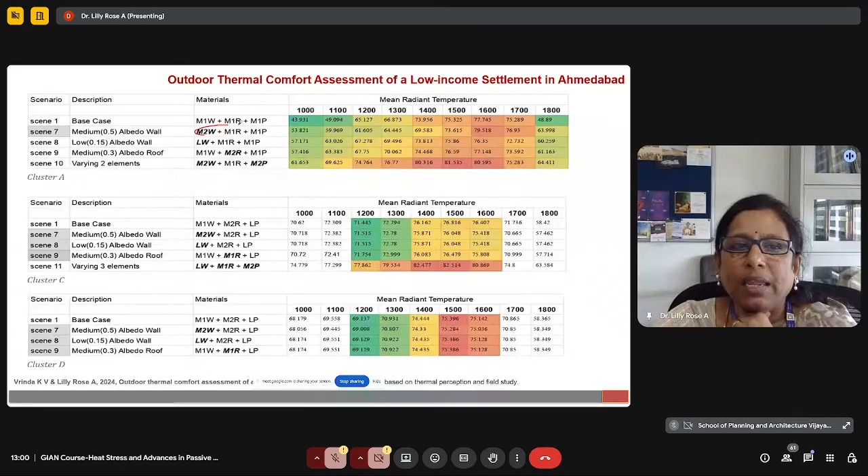In the other three clusters, medium albedo in wall, medium roof, and medium pavement performed better. The maximum temperature ranges were predominantly moderate, with just 1 hour of extreme heat stress. We look at the number of hours of extreme heat stress and its reduction, because you cannot reduce heat stress throughout the day. The intent is to reduce the total number of hours of extreme heat stress rather than removing heat stress from that location entirely, which is not possible with the higher temperatures and humidity experienced in tropical regions. We were able to reduce the extreme heat stress to just 1 hour from the base case, which was approximately 4 hours. That is the kind of approach we had taken.

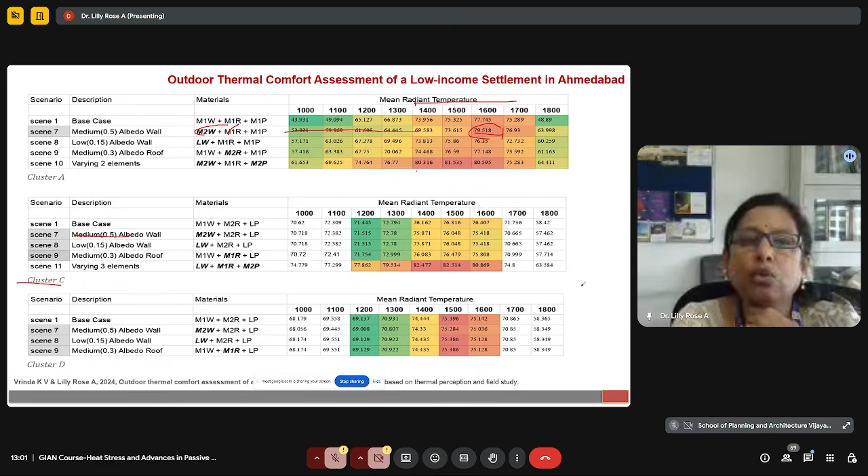Again, in this particular cluster, medium albedo worked better. This study suggested that low-rise informal settlements should avoid higher albedo, as it reflects heat into the atmosphere where it gets trapped, acting as a heat trap, and due to convection at the lower level, the street-level temperature or mean radiant temperature comfort was very hot. So in high-rise buildings, going for higher albedo is better, but in low-rise, especially G+1 structures, higher albedo in the roof may, due to convection, increase heat sensation on the street. That was the finding in this particular study.

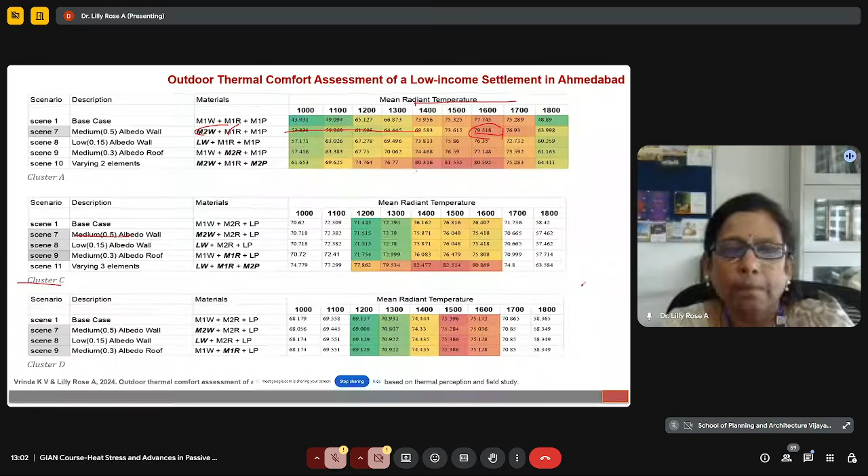Anybody has any queries, any questions, or any aspects to discuss? Good afternoon. Yeah, I have one question actually, ma'am.

You have talked about indoor thermal comfort and outdoor also. In the Indian context, do we have any national standard for indoor thermal comfort, like for RCC roof, tile roof, or tin roof, where the temperature should range between certain degrees Celsius, to be followed by different departments like the housing department? We do have standards in terms of thermal comfort range, indoor thermal comfort range, but in terms of temperature of materials, we don't have that defined.

You're talking about the surface temperature of different materials. That is not defined, because thermal comfort depends on the overall comfort range, so we'll have to follow the thermal comfort range.

IMAC stipulates operative temperature for various cities. So based on IMAC only, we analyze these studies. We were trying to see whether modifying the material assembly in the building envelope can enhance comfort and bring it within that comfort range. That is the intent.